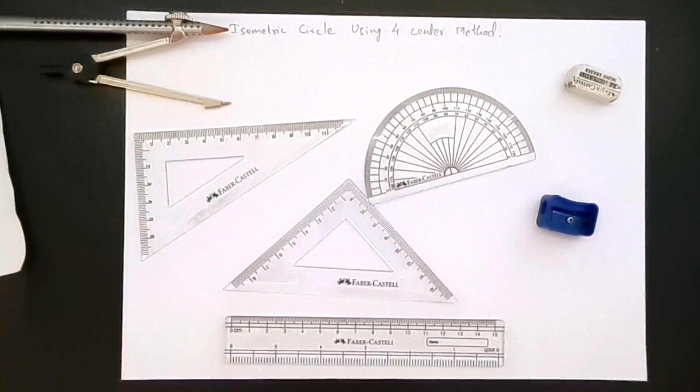Hello everyone, and welcome to this video series where we learn how to create isometric drawings using our standard tools. Standard tools are pencil, scale, your set squares, your protractor, compass, and as standard, your eraser and your sharpener.

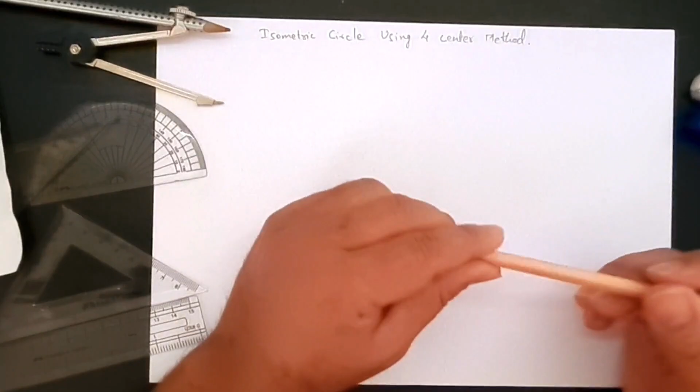So today we are going to create an isometric circle using the 4-center method. To do this, we can start with a circle first and then create the isometric circle as we did for the isometric circle using the ordinate method. But this one using the 4-center method is a bit easier because you don't have to draw the normal circle first and then copy all of those lines on the isometric circle. So let's get started with drawing our isometric circle using the 4-center method directly.

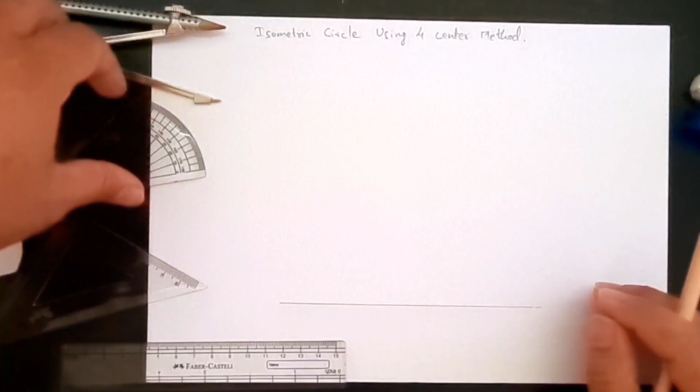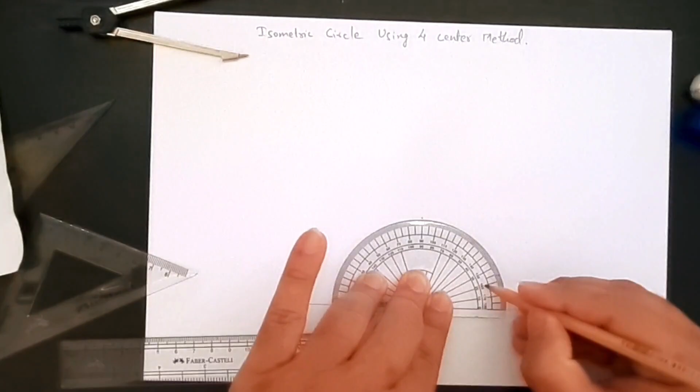So let's first create a horizontal line. From there, let's create 2 lines at 30-degree angle to the horizontal line and 1 vertical line. So first create a center point, and then that's your 90-degree line, that's your 30-degree, and that is your 150-degree line.

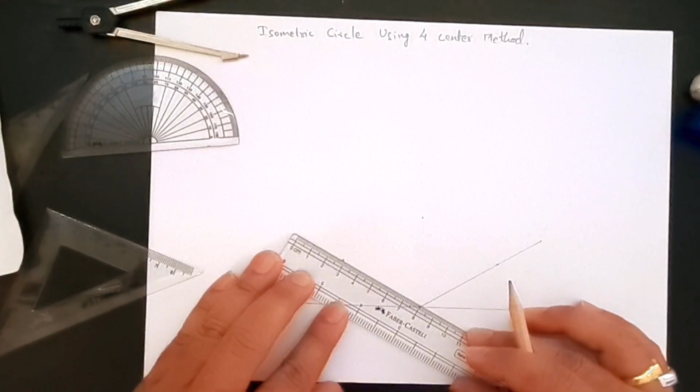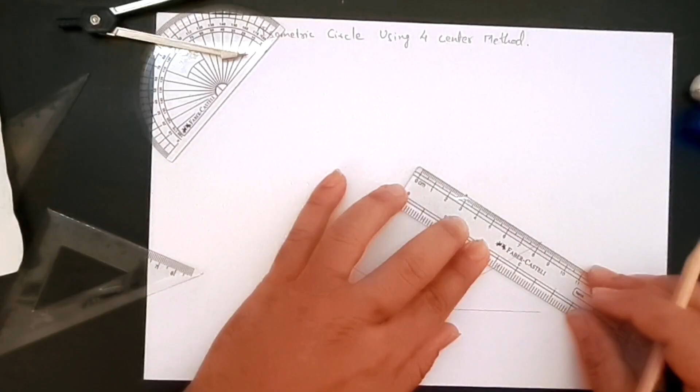And then let's create our 80 millimeter square in isometric form. So that's 80. And that is 80 as well. And then, as we know, we need to create another line from this corner at 120 so that we can draw that square. So again, creating that line at 80 millimeters. And then just finishing it off with this final line.

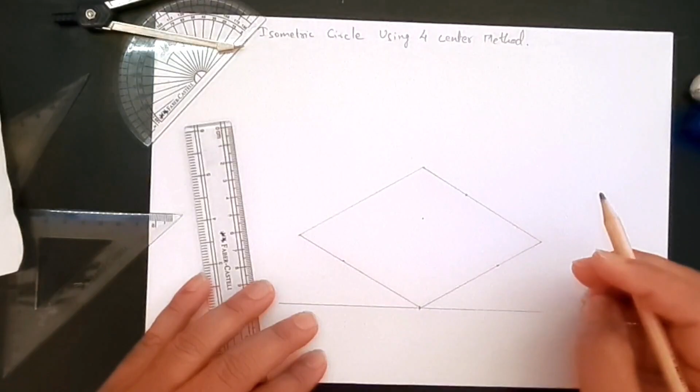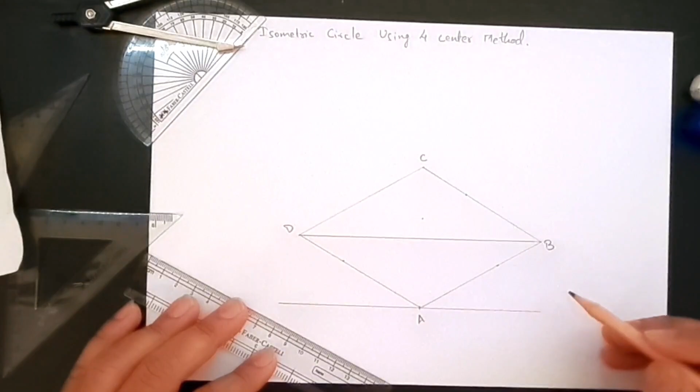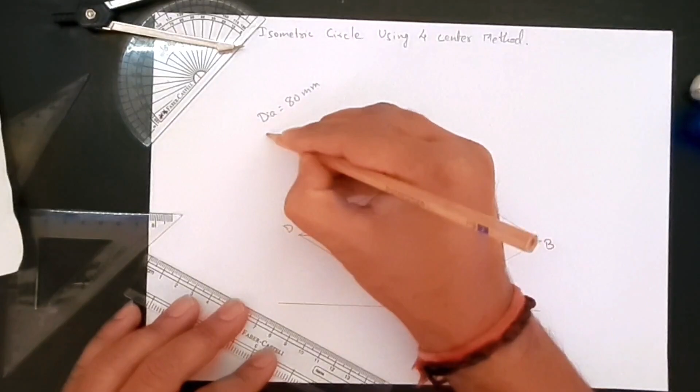Now here, a couple of things that we need to do. Let's first give them names. Now we can give arbitrary names. Let's give A, B, C, and D to the corners. Now let's create a line DB or BD, however you'd like to call it. So that's our center line. Now, we know that the diameter of the circle is 80 millimeters. So the radius is equal to 40 millimeters.

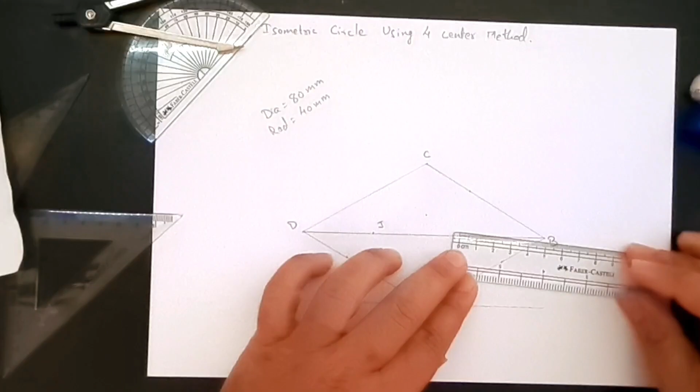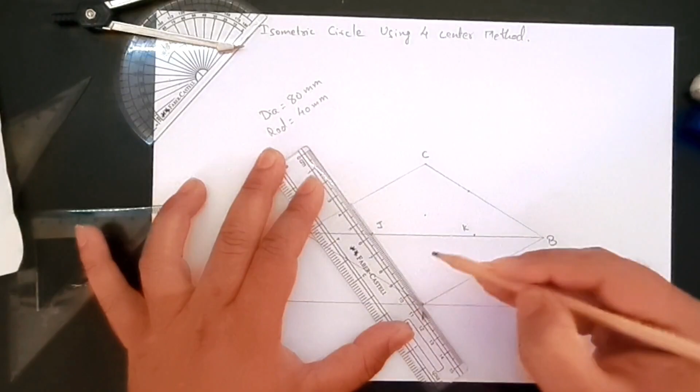So then from this point D, let's create a point here at 40 millimeters. Let's call this point J. And from point B, again the same thing, 40 millimeters, and let's call this K. Now from point A, let's create a straight line joining point A and point J. So that touches this line CD. Let's call this X.

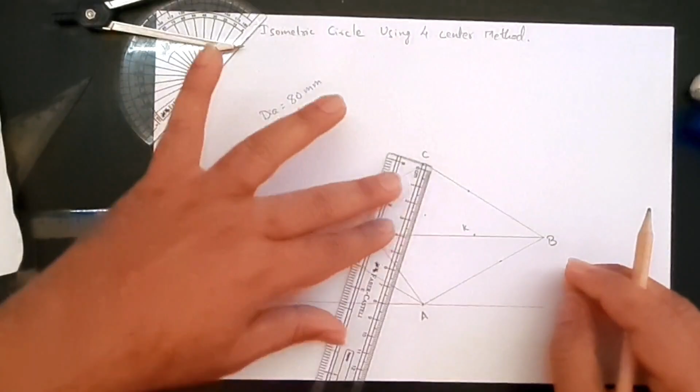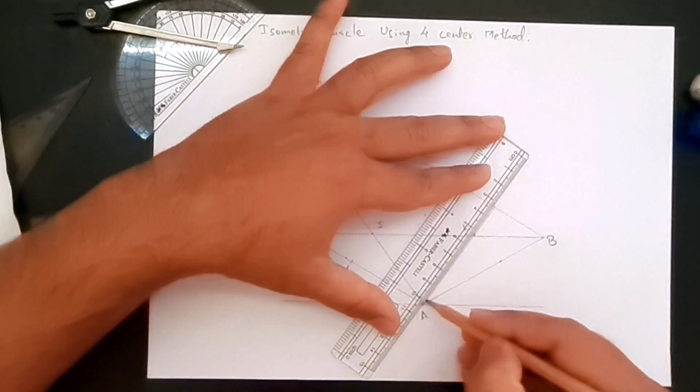We can also create a line here, again joining J. It will join here. Call it Y. Again from A joining K, a line, and then from C, same thing. So we called them X, Y, Z, and W.

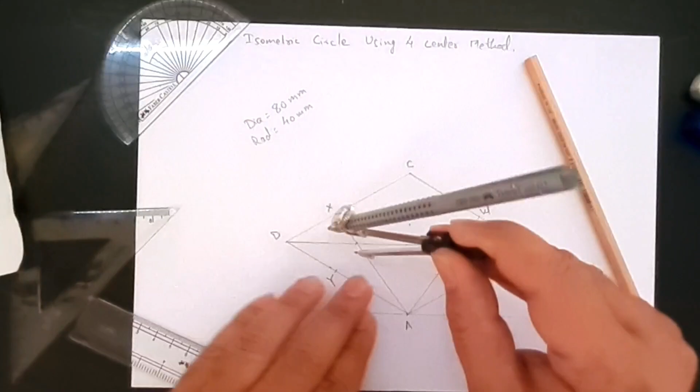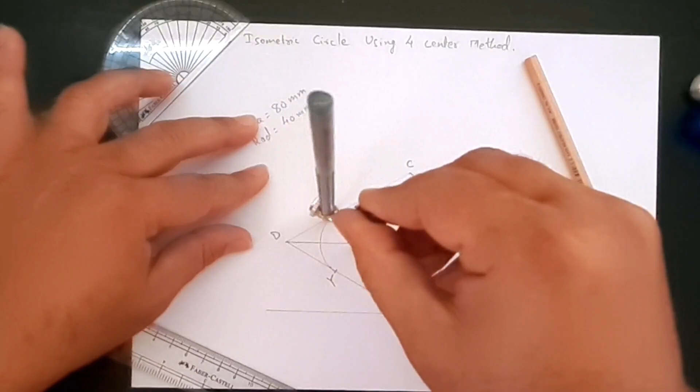Okay. Now, we have our compass, taking J as the center and the radius equal to JX. Let's draw an arc. That arc would be from X to Y. Same thing we can do with K as center point, and KW or KZ as the radius.

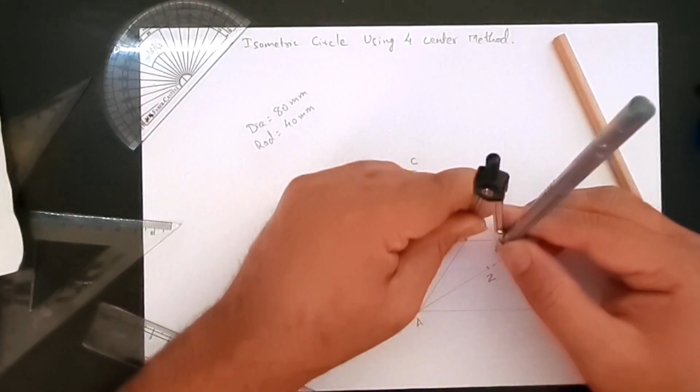Drawing it with a left hand is a bit hard because I'm right-handed, that's why. Won't be a problem for anyone who is left-handed.

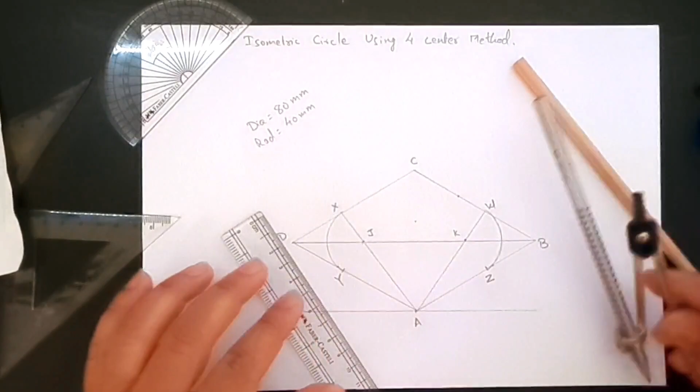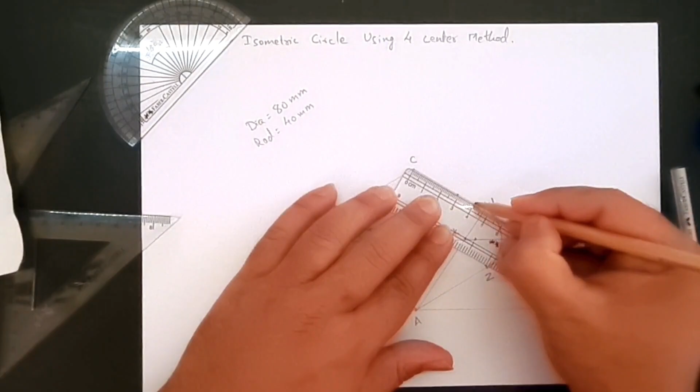Now, when we have all of this, we need to find out the center point of CD. We know that the center point of CD would be at point number 40. So let's go around and find out the center point everywhere. We don't have to measure those center points because we know that the center point of an 80 millimeter line would be at 40. So let's create another straight line from A.

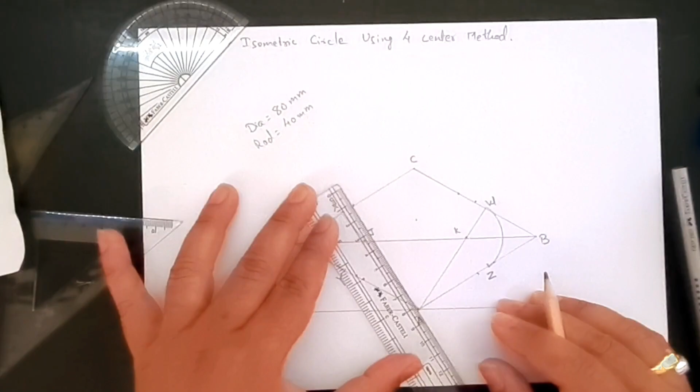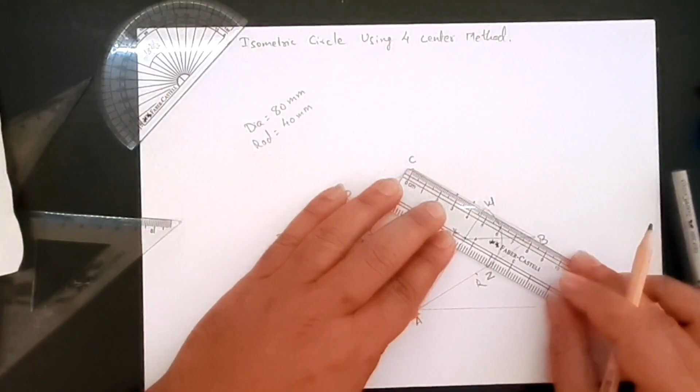Now let's give these some names as well. We had used ABCD, so let's say PQRS. P, Q, R, and S is this point. This is point S. So again, taking AP, but if we take A as the center and AP as the radius, we can draw an arc here.

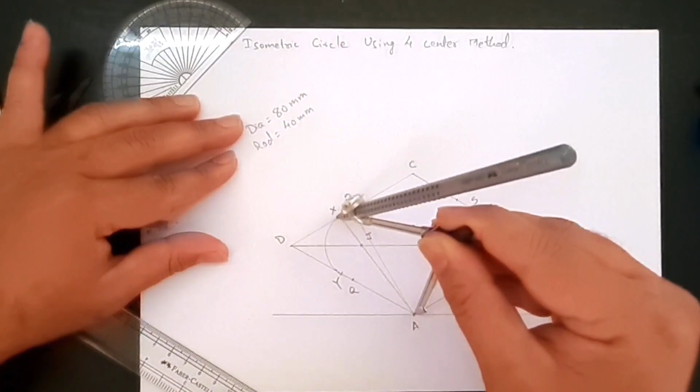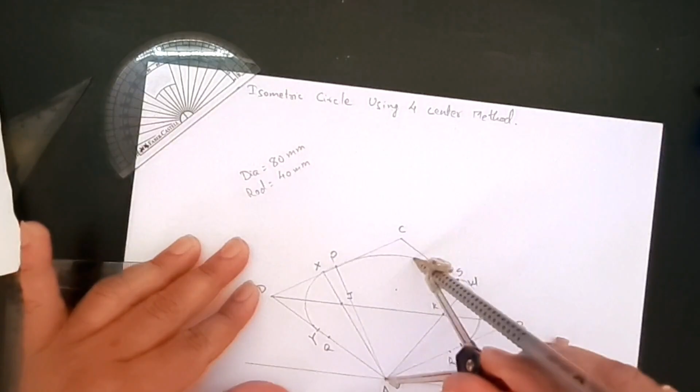It is going a bit further out, so let's make it a bit neater. Yep, there you go. And then do the same thing taking C as the center. And there you have it. That is your isometric circle using the 4-center method.